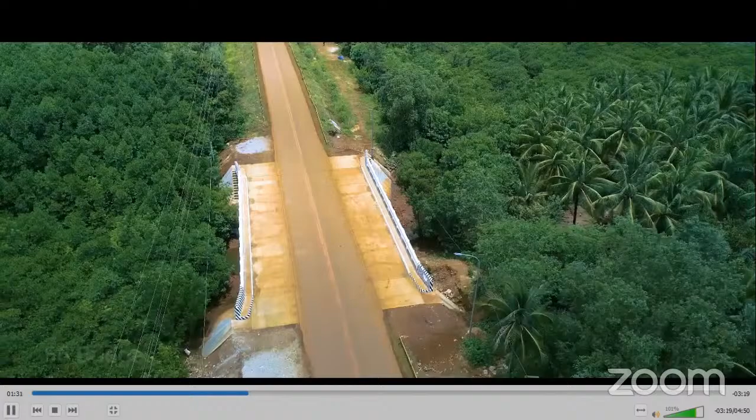Surigao del Norte's 2nd Engineering District also maintains 56 bridges, including 2,521.52 linear meter concrete bridges and 582.23 linear meter steel bridges.

Focused on building for progress, its massive projects are only the beginning to an even bigger Surigao del Norte. Being implemented in the major areas along the stretch of Surigao Wharf Road are the Ang Maharlika Lipata Surigao section, Surigao Davao Coastal Road, Quezon, Mapawag, Kapalayan.

The Lipata Port and Ferry Terminal has a significant role to the extensive Pan-Philippine Highway H26 Maharlika Highway in the northernmost terrain of Mindanao that winds up in Surigao City, dissecting the Surigao Valley before Surigao Davao Coastal Road spur at Bad-as Placer.

The construction of a road opening at the secondary road leading to the city port area linked from Quezon Mapawag Road traversing the Cagayan Cayutan Canlanipa Road section, passing through its coastal barangay, which is foreseen to serve as an alternative route as distance savings, particularly for those heavy truckload vehicles going to and coming from the seaport area.

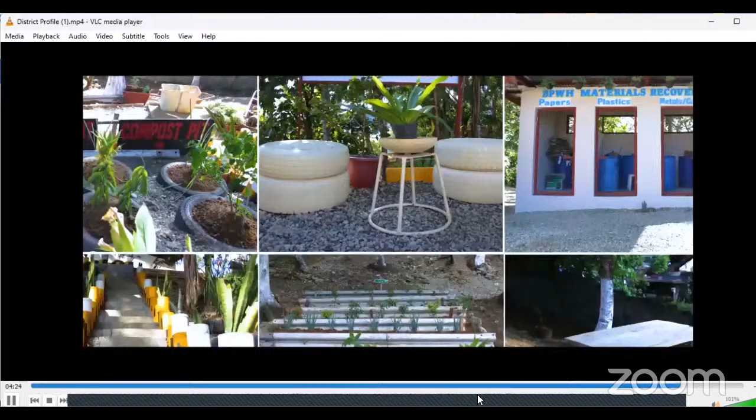The district does not only work on improving lives through quality infrastructure, but also works on refining lives by protecting nature. The agency supports environmental activities, maintained and improved its environment-friendly workplace, for which the district earned its nomination as one of the eco-friendly DEOs in the Philippines.

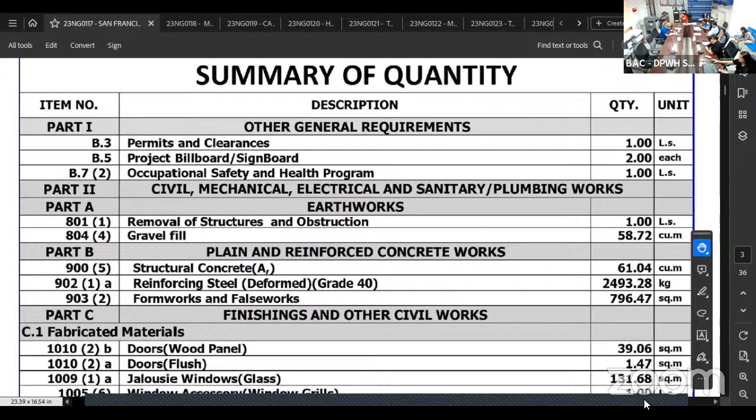For fabricated materials, we have item 1010-2B doors wood panel, 39.06 square meters. Item 1010-2A door flush, 1.47 square meters.

Item 1009-1A jalousie window glass, 131.68 square meters. Item 1005-6 window accessory window grills, lump sum.

Item 1008-1C aluminum glass windows awning type, 2.88 square meters. Item 1008-1D aluminum glass window transom fixed type, 24.02 square meters.

Item 1003-17 carpentry and joinery works for air vent, lump sum. Item 1004-2 finishing hardware includes lock set and hinges, lump sum.

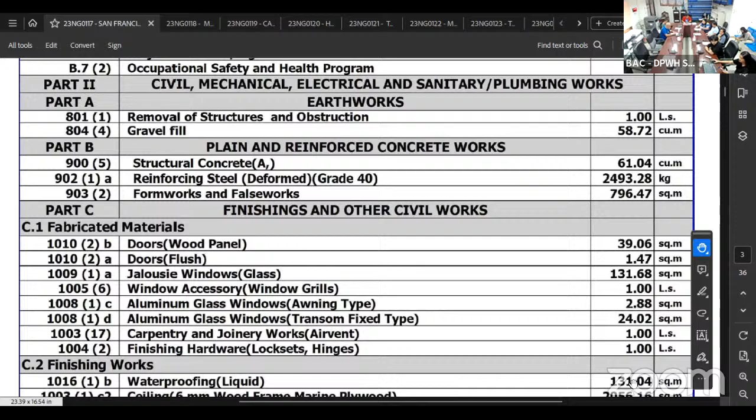For the finishing works, we have item 1016-1B waterproofing liquid, 131.04 square meters. Item 1003-1C2 ceiling with 6mm thick wood frame marine plywood, 2,056.16 square meters.

Item 1003-2A1 wall with 4.5mm thick metal frame fiber cement board, 60.03 square meters. Item 1003-11A1 fascia board with 12mm thick fiber cement board, 378.81 meters.

For painting works, we have item 1032-1A painting works for masonry concrete, 127.20 square meters. Item 1032-1B painting works for wood, 4,104.97 square meters. Item 1032-1C painting works for steel, 2,101.74 square meters.

For roof framing and roofing works, we have item 1014-1B1 pre-painted metal sheets above 0.427 millimeter, corrugated type long span, 746.21 square meters. Item 1013-2A1 fabricated metal roofing accessories gauge 26, ridge or hip rolls, 69.9 linear meters.

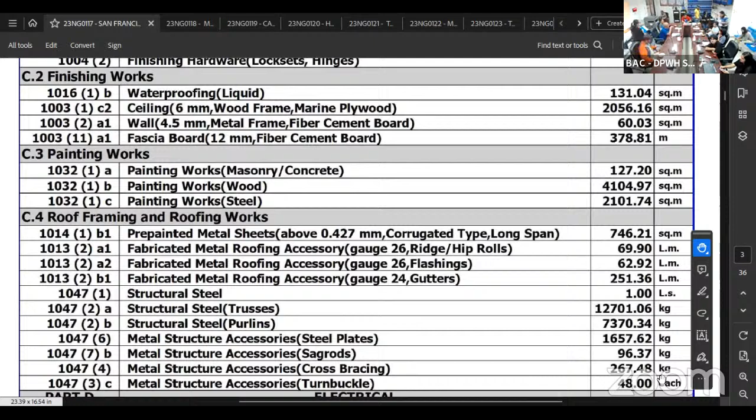7,370.34 kilograms. Item 1047-6 metal structure accessories for steel plates, 1,657.62 kilograms. Item 1047-7B metal structure accessories for sagrods, 96.37 kilograms.

Item 1047-4 metal structure accessories for cross bracing, 267.48 kilograms. Item 1047-3C metal structure accessories for turnbuckles, 48 each.

And for electrical works, we have item 110010 conduit boxes and fittings, lump sum. Item 110133 wires and wiring devices, lump sum. And item 11031 lighting fixtures, lump sum.

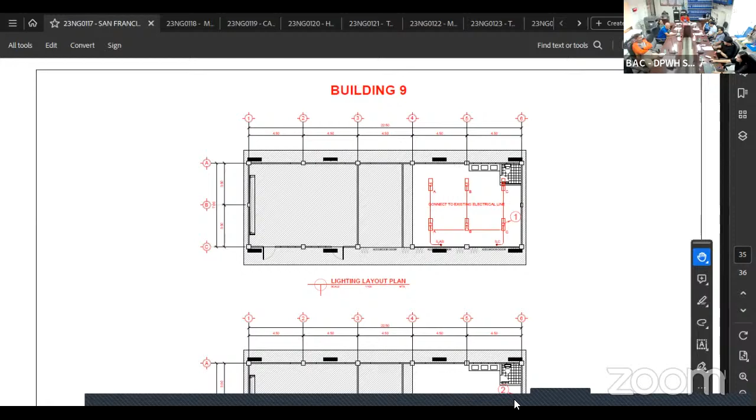So we will proceed with the second contract, 23NG0118, repair of classroom Mabua Elementary School, Surigao City, Surigao del Norte, with an ABC of 6,266,736 pesos and 15 centavos, with a contract duration of 135 calendar days.

So this will also be discussed. Let's proceed for the plan of repair of classroom Mabua Elementary School, located at Barangay Mabua, Surigao del Norte.

For the summary of quantities, we have item B.3, permits and clearances, lump sum. Item B.5, project billboard or signboard, 2 each. Item B.7.2, occupational safety and health program, lump sum.

For earthworks, we have item 801.1, removal of structures and obstruction, lump sum. Item 803.1A, structure excavation of common soil, 0.6 cubic meters. Item 804.1A, embankment from structure excavation, 2.3 cubic meters. Item 804.4, gravel fill, 11.96 cubic meters.

For plain and reinforced concrete works, we have item 900.5, structural concrete class A, 30.75 cubic meters. Item 902.1A, reinforcing steel of deformed grade 40, 1,128.27 kilograms. Item 902.1B, reinforcing steel of deformed grade 60, 85.23 kilograms. And item 903.2, formworks and falseworks, 32.68 square meters.

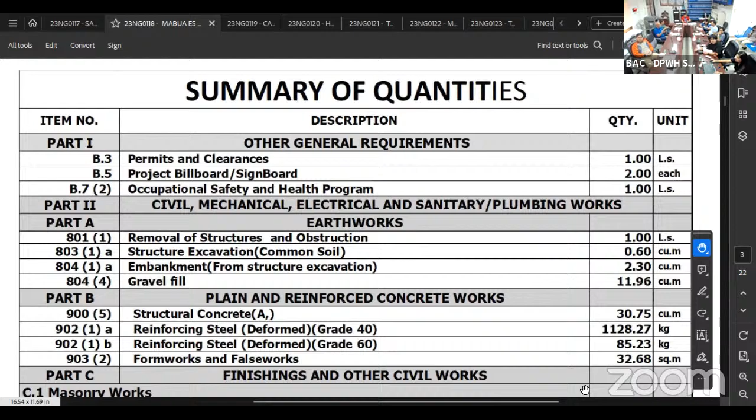Para sa masonry works, we have item 1046, 2A1, CHB non-load bearing, include reinforced steel, 100 mm, 26.48 square meters. Para sa fabricated materials, we have item 1010, 2B, doors, wood panel, 17.01 square meters.

Item 1010, 2A, door flush, 2.52 square meters. Item 1009, 1A, jalousie window, glass, 66.69 square meters. Item 1005, 6, window accessories for window grills, lump sum.

Item 1008, 1D, aluminum glass windows, transom fixed type, 16.5 square meters. Item 1003, 17, carpentry and joinery works, includes door jambs, air vent, and blackboard, lump sum.

Item 1004, 2, finishing hardware, includes lock set and hinges, lump sum. Para sa finishing works, we have item 10271, cement plaster finish, 26.48 square meters.

Item 1003, 1C2, ceiling 6 mm thick wood frame and plywood, 487.54 square meters. Item 1003, 11A1, fascia board, 12 mm thick fiber cement board, 122.29 meters. Item 10183, granite tiles,

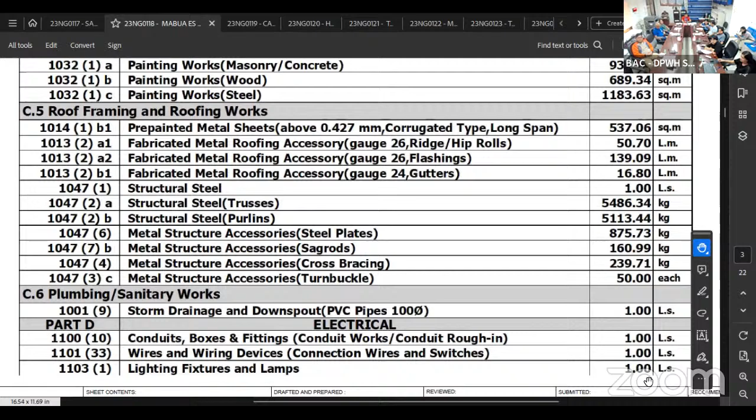For sa plumbing or sanitary works, we have item 1001, 9, storm drainage and downspout of PVC pipes of 100 mm diameter, lump sum. Para sa electrical works, we have item 1100, 10, conduit boxes and fittings, lump sum. Item 1101, 33, wires and wiring devices, lump sum. And item 11031, lighting fixtures and lamps, lump sum.

So none, we will proceed with the third contract, 23NG0119, repair classroom, Cansayong Elementary School, Malimono, Surigao del Norte, with an ABC of 4,628,704 pesos and 41 centavos, with a contract duration of 150 days.

Good morning, everyone, ma'am, sir. So, for the project, repair classrooms, Cansayong Elementary School at Malimono, Surigao del Norte. So, here are the...

Summary of quantities. Item B3, permits and clearances, 1 lump sum. Item B5, project billboards, signboard, 2 each. B7-2, occupational safety and health program, 1 lump sum. Item 8011, removal of structures and obstruction, 1 lump sum.

100317, carpentry and joinery works, 1 lump sum. 10031C2, ceiling, marine plywood, 525.47 square meters. 100311A1, fascia board, 154.2 meters. 1032-1C, painting work steel, 1070.23 square meters. 1014-1B1, pre-painted metal sheets, corrugated long span, 551.19 square meters. 1013-2A1, fabricated metal roofing accessory, ridge rolls, 58.2 linear meters. 1013-2A2, flashings, 211.2 linear meters.

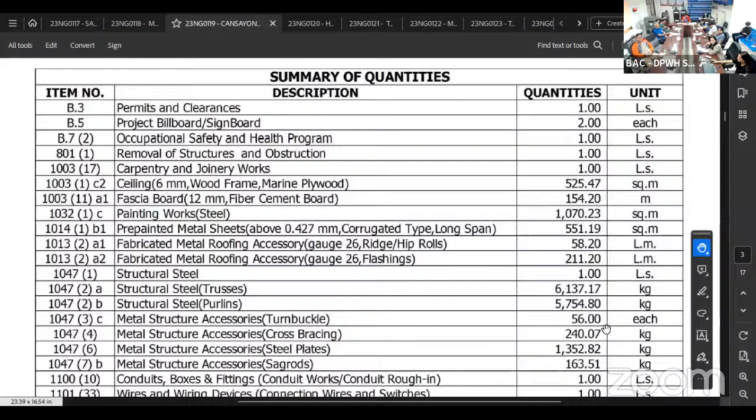1047-1, structural steel, 1 lump sum. 1047-2A, structural steel trusses, 6,137.17 kilograms. 1047-2B, purlins, 5,754.8 kilograms. 1047-3C, turnbuckle, 56 each. 1047-4, cross bracing, 240.07 kilograms. 1047-6, steel plates, 1,352.82 kilograms. 1047-7B, metal structure accessories sagrods, 163.51 kilograms.

110010, conduits, boxes, and fittings, 1 lump sum. 110133, wires and wiring devices, 1 lump sum. 11031, lighting fixtures and lamps, 1 lump sum.

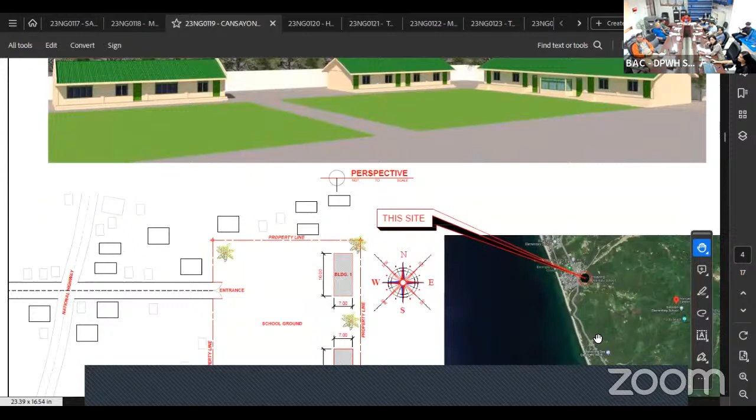So let's proceed to the plan. So it's the perspective of the project. We can see 3 buildings: one with 2 classrooms, another with 2 classrooms, and one with 2 classrooms with principal's office on the middle. So, let's look at the site development plan.

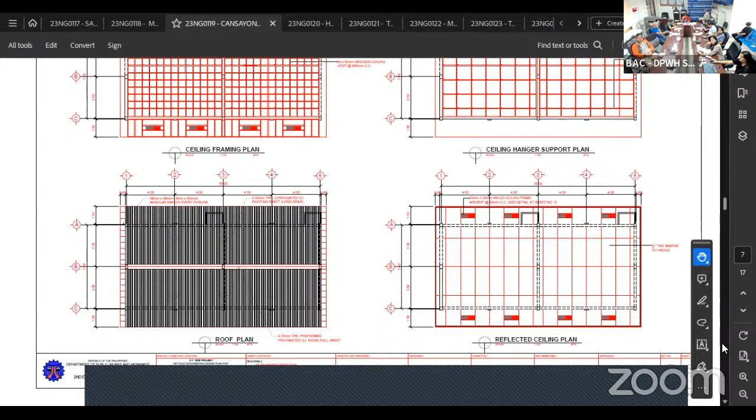Next. So, building 2, ceiling framing plan, ceiling hanger support plan, roof plan and reflected ceiling. So, building 3, ceiling plan and roof plan.

So, any other queries for contract 23NG0119?

So, none. So we proceed with the fourth contract. 23 NG 0120, repair of classroom Hanagdong Elementary School, Malimono, Surigao del Norte. With an ABC of 3,469,790 pesos and 51 centavos and a contract duration as specified.

So for the project repair of classrooms sa Hanagdong Elementary School at Malimono, Surigao del Norte. Let's proceed for the summary of quantities.

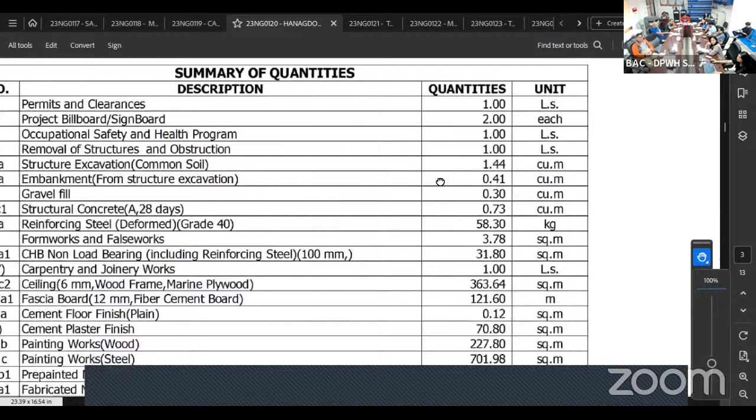B3 permits and clearances, 1 lump sum. B5 project billboard signboard, 2 each. B7-2 Occupational Safety and Health Program, 1 lump sum. 8011 removal of structures and obstruction, 1 lump sum. 8031-1A structure excavation, 1.44 cubic meters. 8041A embankment from structure excavation, 0.41 cubic meters. 8044 gravel fill, 0.3 cubic meters. 9001C1 structural concrete, 0.73 cubic meters. 9021A reinforcing steel, grade 40, 58.3 kilograms. 9032 formworks and falseworks, 3.78 square meters.

1046-2A1 CHB non-load bearing 100 millimeter thick, 31.8 square meters. 100317 carpentry and joinery works, 1 lump sum. 10031C2 ceiling marine plywood, 363.64 square meters.

100311A1 fascia board, 121.6 meters. 10211A cement floor finish plain, 0.12 square meters. 10271 cement plaster finish, 70.8 square meters. 10321B painting works wood, 227.8 square meters.

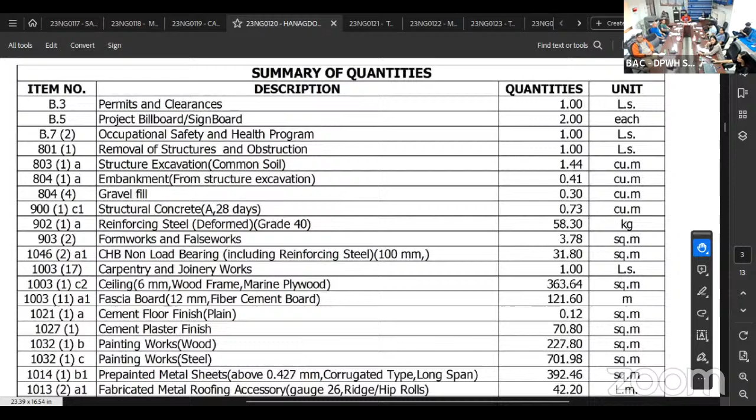10321C painting works steel, 701.98 square meters. 10141B1 pre-painted metal sheets, corrugated long span, 392.46 square meters. 10132A1 fabricated metal roofing accessory, ridge rolls, 42.2 linear meters. 10132A2 flashings, 158.8 linear meters.

10471 structural steel, 1 lump sum. 10472A structural steel trusses, 4,364.26 kilograms.

10472B purlins, 4,062.7 kilograms. 10473C turnbuckle, 40 each. 10474 cross bracing, 166.91 kilograms. 10476 steel plates, 885.75 kilograms.

10477A bolts, 14.19 kilograms. 10477B sagrods, 114.68 kilograms. 110010 conduits, boxes, and fittings, 1 lump sum. 110133 wires and wiring devices, 1 lump sum. 1103 lighting fixtures and lamps, 1 lump sum.

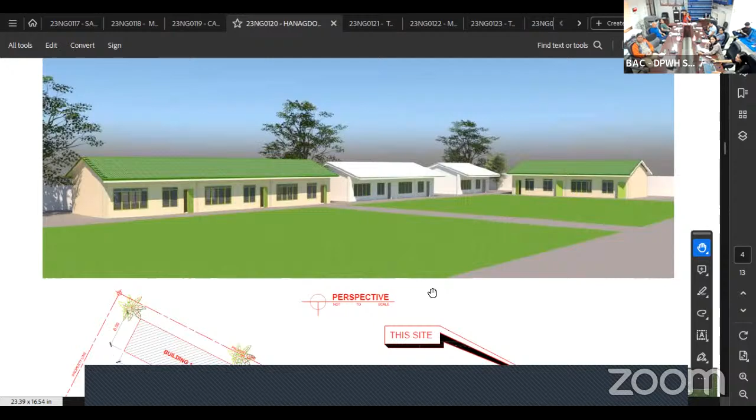So we can see the perspective of the school. You can see that there are 4 buildings, but the colored buildings are the ones involved in the project. The buildings included in the project have 3 classrooms and 2 classrooms. You can see the site development plan.

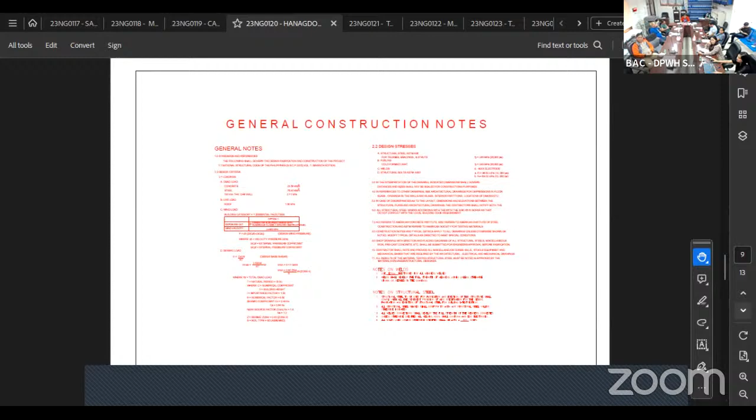Any other questions? So we will proceed with the fifth contract, 23 NG0121, repair of classroom, Tagana-an National High School, Tagana-an, Surigao del Norte, with an ABC of 1,523,672 pesos and 28 centavos, with a contract duration of 60 calendar days.

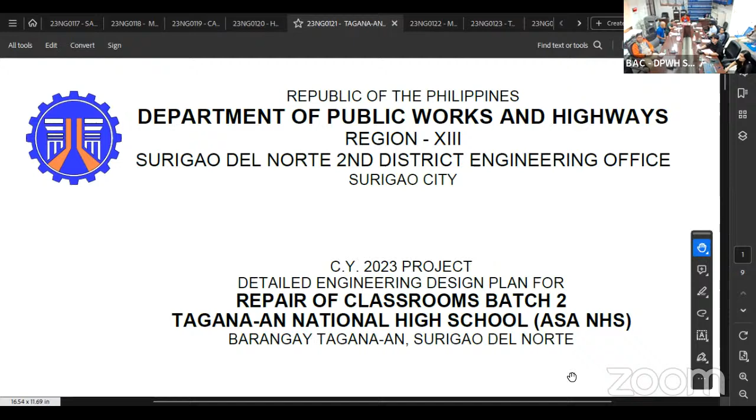For the project repair of classroom, batch 2, Tagana-an National High School, located at Barangay Tagana-an, Surigao del Norte.

For the summary of quantities, we have item B.3, permits and clearances, lump sum. Item B.5, project billboard or signboard, 2 each. Item B.7.2, occupational safety and health program, lump sum. For earthworks, item 801.1, removal of structures and obstruction, lump sum.

Item 903.2, formworks and false works, 14.37 square meters. For fabricated materials, item 1003.17, carpentry and joinery works for air vent, lump sum.

For finishing works, item 1003.1C2, ceiling with 6 mm thick wood frame marine plywood, 525.88 square meters.

For painting works, item 1032.1C, painting works for steel, 186.87 square meters. For roof framing and roofing works, item 1047.1, structural steel, lump sum.

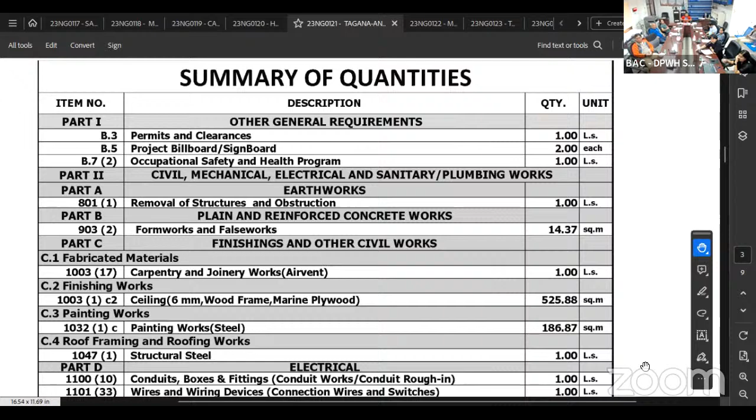For electrical works, item 1100.10, conduit boxes and fittings, lump sum. Item 1101.33, wires and wiring devices, lump sum. And item 1103.1, lighting fixtures and lamps, lump sum.

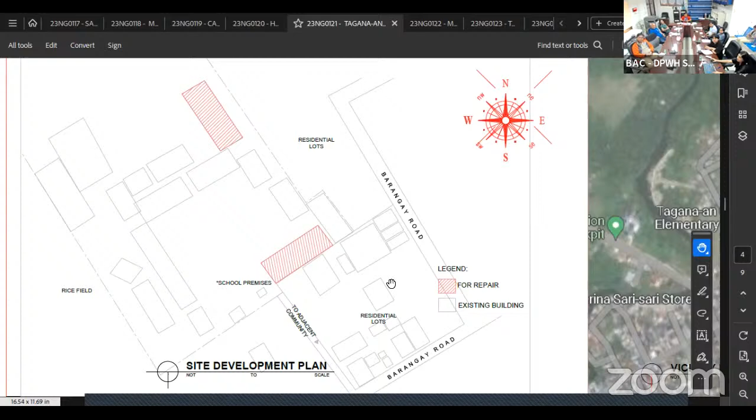So the building is two-story with 6 classrooms. The scope of works is replacement of ceiling and ceiling frame, replacement of ceiling ventilation, replacement of electrical connections, and replacement of roofing accessories.

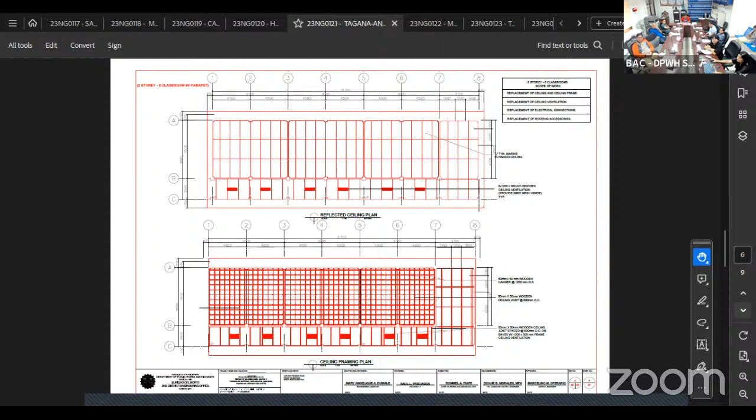For this two-story, 6-classroom building, the scope of works is also replacement of ceiling and ceiling frame, replacement of ceiling ventilation, replacement of electrical connection, and replacement of roofing accessories. For the next building, the ceiling is also changed, but here the portion includes the corridor to be replaced with ceiling.

So here's the typical ceiling hanger plan. Next, you're already familiar with this. This is the ceiling hanger detail, or the spot details and block details.

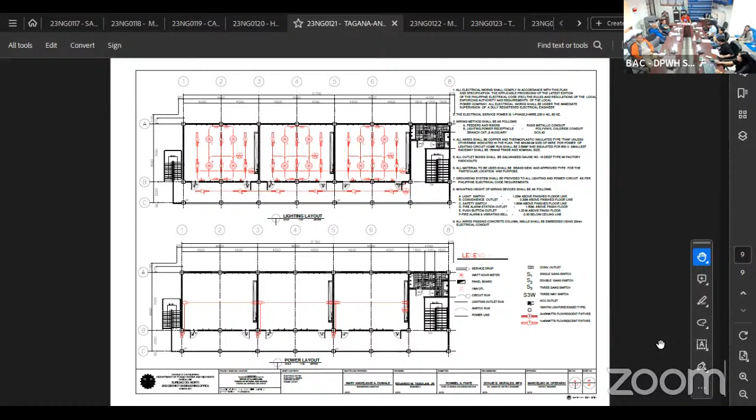Thank you. Okay, so there are no concerns, so we'll proceed with the sixth contract, 23 NG0122, repair of classroom, Martinez Elementary School, Surigao City, with an ABC of 1,112,112 pesos and 71 centavos, with a contract duration of 60 calendar days.

For the project repair of classrooms, Martinez Elementary School, at Surigao City, Surigao del Norte. Let's proceed to the summary of quantities.

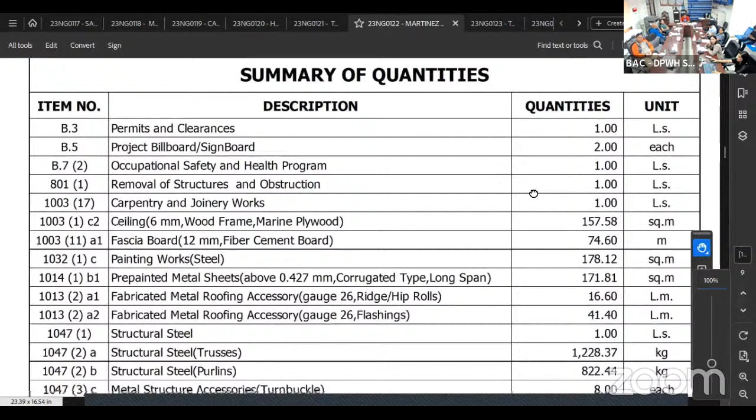Item B3, permits and clearances, 1 lump sum. B5, project billboard signboard, 2 each. B7-2, occupational safety and health program, 1 lump sum. 8011, removal of structures and obstruction, 1 lump sum.

100317, carpentry and joinery works, 1 lump sum. 1003 1C2, ceiling, marine plywood, 157.58 square meters. 100311A1, fascia board, fiber cement board, 74.6 meters.

1032 1C, painting work, steel, 178.12 square meters. 1014 1B1, prepainted metal sheets, corrugated, long span, 171.81 square meters. 1013 2A1, fabricated metal roofing accessory, ridge rolls, 16.6 linear meters. 1013 2A2, flashings, 41.4 linear meters.

1047 1, structural steel, 1 lump sum. 1047 2A, trusses, 1,228.37 kilograms. 1047 2B, purlins, 822.44 kilograms. 1047-3C, turnbuckle, 8 each. 1047-4, cross bracing, 36.93 kilograms. 1047-6, steel plate, 71.38 kilograms. 1047-7B, sagrods, 25.52 kilograms. 1100 10, conduits, boxes, and fittings, 1 lump sum.

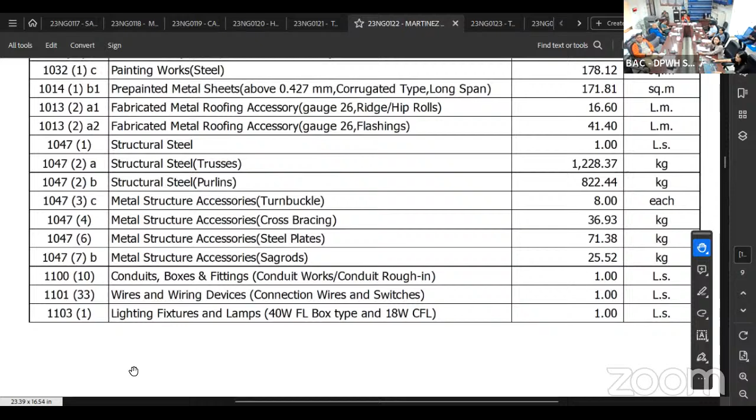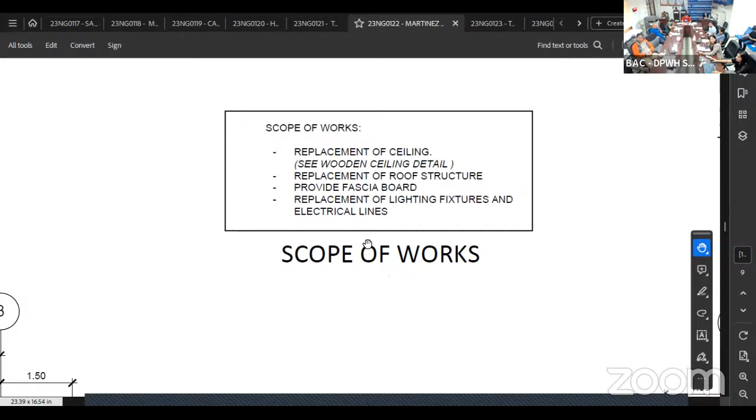So for building 1, the scope of works: replacement of ceiling, replacement of roof structure from wood to steel, fascia board, and lighting fixtures and electrical lines.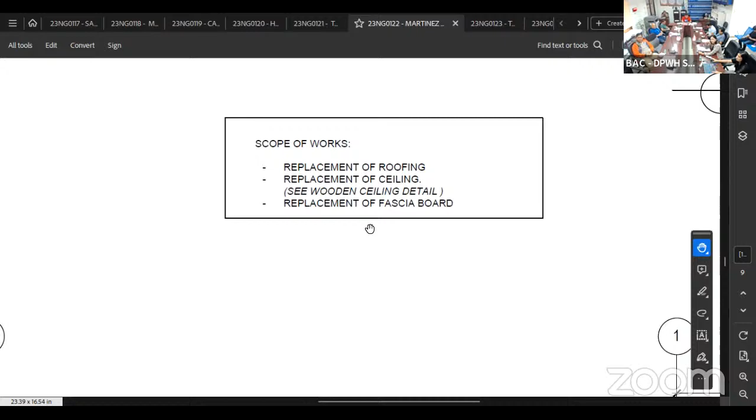So for building 2's scope of works: replacement of roofing. The process extends to the existing wood. They said to remove it but the budget cannot cover it, so: replacement of roofing, replacement of ceiling, replacement of fascia board, and electrical lines.

Next one - ceiling detail. For the ceiling detail, next one.

For the electrical plan, supposedly the standard electrical plan consists of 6 2x40 watt lights, then 4 ceiling fans. But due to budget constraints, fixtures were reduced - from 6 to 3 2x40, then 4 ceiling fans reduced to 1 ceiling wall fan only.

Any more questions, sir? Okay, so we'll proceed with the 7th contract.

23 NG 0123, repair of classroom, Talisay Elementary School, Surigao City, with an ABC of 1,075,873 pesos and 90 centavos, and a contract duration of 60 calendar days.

This will be discussed by the architect. Good morning. Project: repair of classroom, Talisay Elementary School, Surigao City, Surigao del Norte.

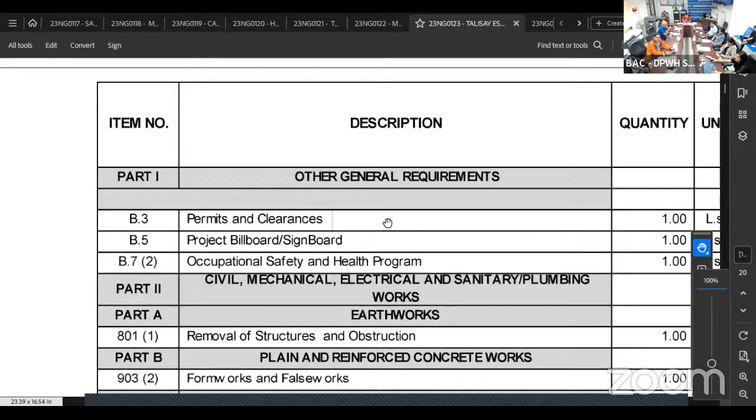B.3, permits and clearances, lump sum. B.5, project billboards and signboard, lump sum. B.7-2, occupational safety and health program, 1 lump sum. Then Part A, 801-1, removal of structures, lump sum. Then 903-2, formworks and falseworks, 1 lump sum.

Then fabricated materials: 1004-2, finishing hardware, locksets and hinges, lump sum. Then 10102-A, doors flush type, 2.46 square meters.

100317, carpentry and joinery works, 1 lump sum. 10321B, painting works, wood, 315.47 square meters. 10321C, painting works, steel, 62.87 square meters.

Then roof framing works: 10031C2, ceiling, 6mm wood frame, marine plywood, 310.55 square meters. 10141B1, prepainted metal sheets, 36.05 square meters.

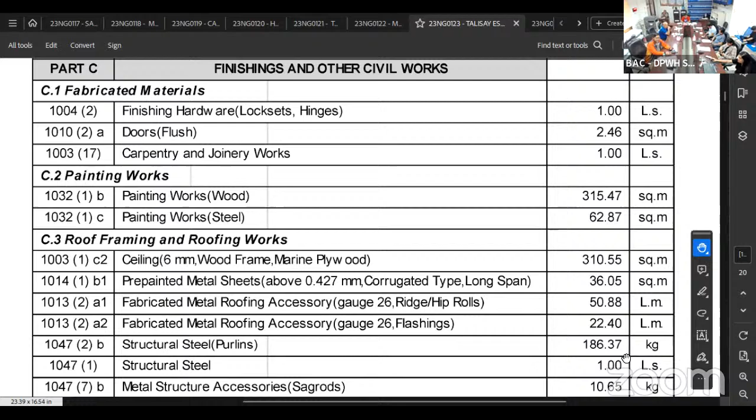10472B, structural steel purlins, 186.37 kilograms. 10471, structural steel, 1 lump sum. 10477B, metal structures accessories, sagrods, 10.65 kilograms.

Then for plumbing works, sewer line works, 1 lump sum. 1100, conduit boxes and fittings, 1 lump sum. 110133, wires and wiring devices, 1 lump sum. 11031, lighting fixtures and lamps, 1 lump sum. Then for Part E, ventilating equipment, ceiling fan, 1 lump sum.

This project comprises 2 buildings only. Our first building is the 2-story building, which has damage to its ceiling. We will replace the ceiling on the upper floor. The ground floor stays as is, including the electrical work upstairs since it is damaged.

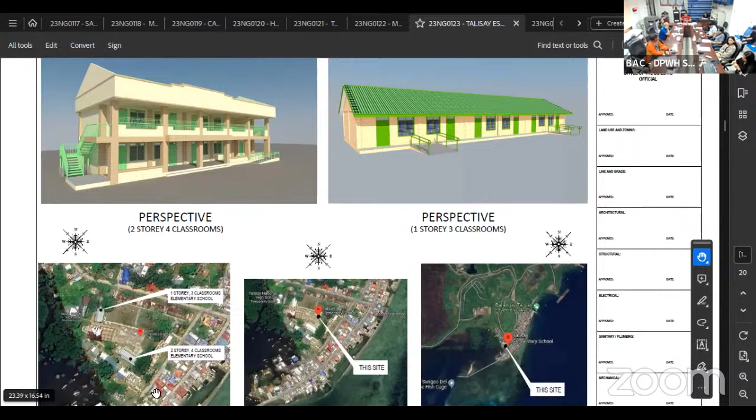Okay, so there are no concerns. We will proceed with the last contract.

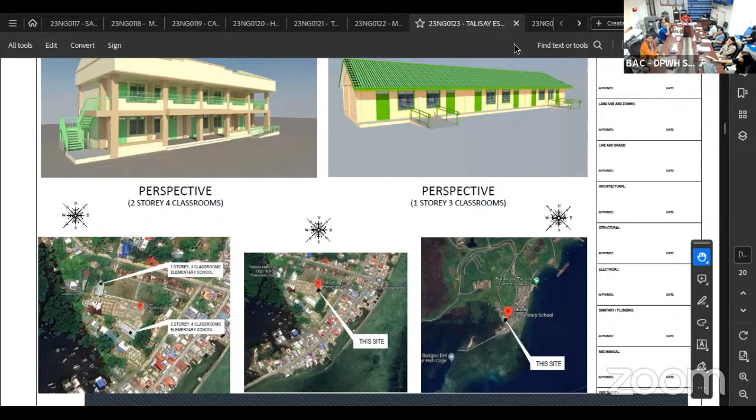Good morning. So the last but not the least project is the repair maintenance of DPWH area equipment admin building located at Bernadette Village, Barangay Lunas, Surigao City.

So the summary of quantities for part 1: B51 project billboard signboard, 2 each; B7 occupational safety and health program, 1 lump sum. Part 2: item 8011 removal of structures and obstructions, 1 lump sum; item 10024 plumbing fixtures, 1 lump sum.

Item 100224 cold water pipes, water lines, PVC pipes for water lines, 1 lump sum. Item 10031A2 ceiling, 4.5mm fiber cement board, 323.05 square meters. Item 10042 finishing hardware, 1 lump sum. Item 10071A aluminum frame glass door sliding type, 6 square meters.

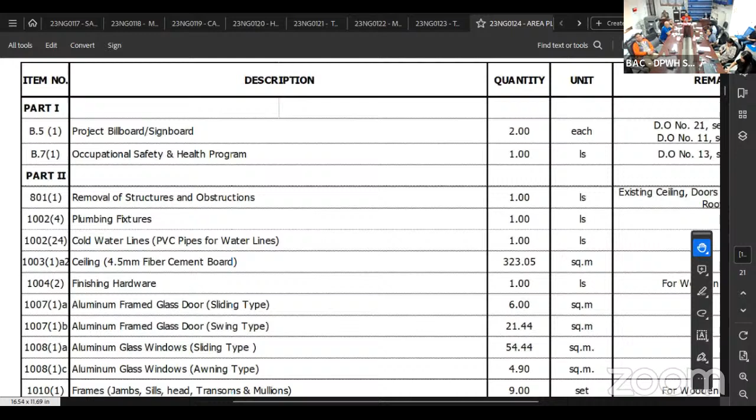Item 10071B aluminum frame glass door swing type, 21.44 square meters. Item 10081A aluminum glass windows sliding type, 54.44 square meters. Item 10081C aluminum glass windows awning type, 4.90 square meters.

Item 10101 frames, jambs, sills, head, transoms and mullions, 9 sets. Item 10102B wooden panel door, 15.12 square meters. Item 10132A fabricated metal roofing accessories, ridge roll, 47.25 linear meters. Item 10132C fabricated metal roofing accessories, gutters, 74.50 linear meters.

Item 10141B2 pre-painted metal sheets, rib type, long span, 304.43 square meters. Item 10181 glazed tiles and trims, 52.74 square meters. Item 10182 unglazed tiles, 10.26 square meters. Item 10183 granite tiles, 242.89 square meters.

Item 10271 cement plaster finish, 86.10 square meters. Item 10321A painting works, masonry painting, which includes the ceiling quantity of 1,095.60 square meters. Item 10431 PVC doors and frames, 6.30 square meters. Item 10461A1 100mm CHB non-load bearing including reinforcing steel, 10.80 square meters.

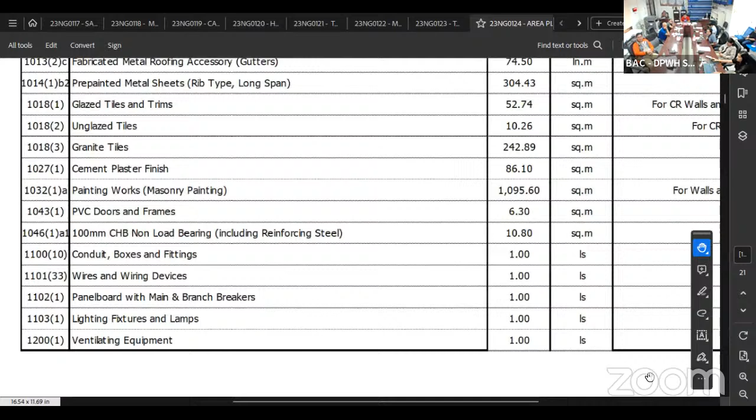Item 11010 conduit boxes and fittings, 1 lump sum. Item 110133 wires and wiring devices, 1 lump sum. Item 11021 panel board with main and branch breakers, 1 lump sum. Item 11031 lighting fixtures and lamps, 1 lump sum. And last, item 12001 ventilating equipment, 1 lump sum.

So this is the perspective of the building. The major activity for this repair is replacement of all ceiling and roofing materials, excluding the frames, since the structural process is still durable; replacement of all doors and windows; replacement of all existing tiles; electrical works; as well as replacement of all fixtures in the comfort rooms. That's all.

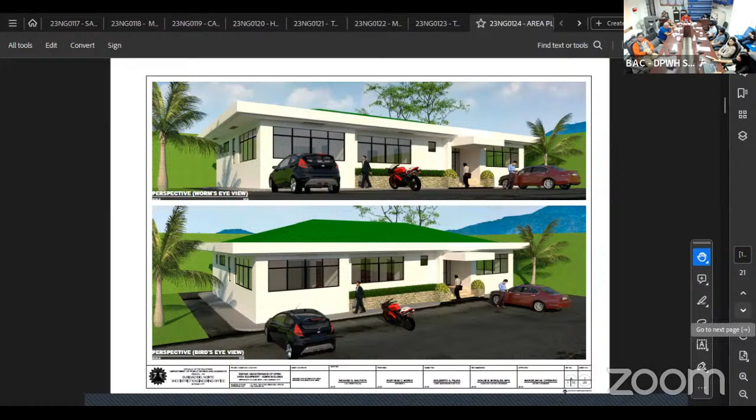Okay, thank you. So we have discussed the advertised contract for their detailed engineering design and also the quantities for all the contractors who want to join the opening of these contracts. If there are additional queries you want to ask, you may ask from the planning and design section and from the maintenance section for the last contract.

So the second part will be the discussion of the checklist required for the attachment of financial and technical documents. It will be discussed by Atty. Co.

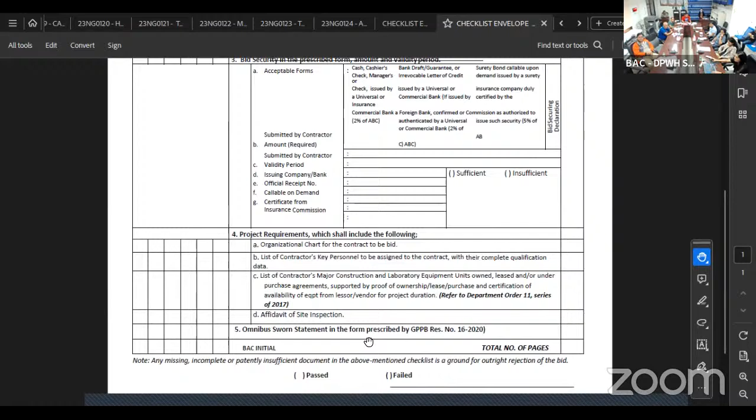Good morning once again. For the reminders, for those who are interested bidders, kindly look at the checklist on screen. These are the requirements for the technical and financial documents listed, emphasizing also Department Order 11, series of 2017.

We also have an additional requirement, the affidavit of site inspection. So those documents must be provided, and in case the contractor cannot submit the required documents, the contractor is outright disqualified. That's all, sir.

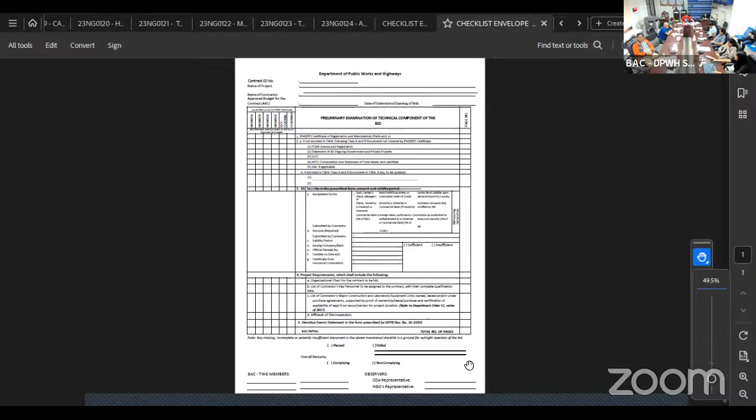Thank you, Sam. I would also like to emphasize the prescribed format in Department Order 11, series of 2017, that if they want to submit documents, they should follow the prescribed format which was advertised on the contracts.

I would also like to emphasize that any contractors who want to join these advertised projects, the opening will be this December 13, 2023, and the deadline for submission of bids is before 10 a.m. Also, payments for the bidding documents is until 9 a.m. Any contractor who wants to buy the bidding documents or join this bidding should pay before 9 a.m.

Also, as stated in the advertisement, availability of bidding documents is from November 23, 2023 to December 13, 2023, until 9 a.m. only. After that, no fees or order of payment will be issued past 9 a.m. So I think that's clear enough.